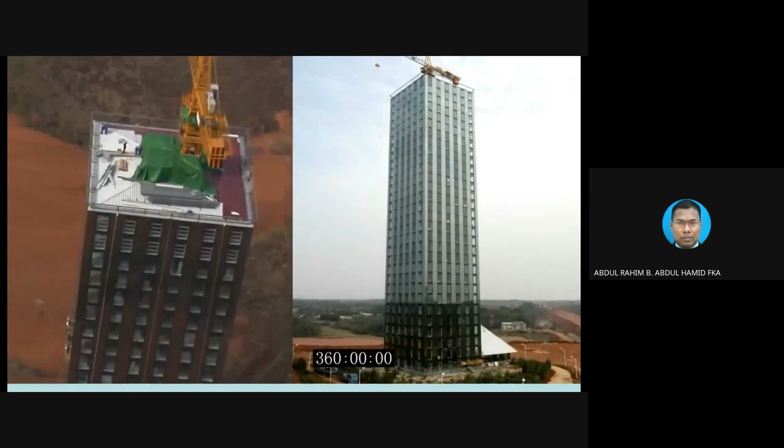I'm not really sure whether you can hear and see the short video clip or not, but there are a lot on YouTube, normally from China, of fantastic high-rise building construction done in a very short period of time. The one that you saw is basically the time lapse of about 15 days for maybe a 20-story hotel building.

The question is, if for instance we were going to construct those kinds of things in Malaysia, or in whatever country you are in, it might take a few years anyway, not including extension of time, delays, etc. I would say normally, easily you can go for 2 years or maybe 3 years. Okay, that is normal practice.

But the question is, can we compress or shorten the construction period to even perhaps 2 weeks for the installation period? Of course, the preparation and fabrication of what we call precast concrete panels, etc., might take a little bit longer than 2 weeks. But overall, it is much shorter than normal construction.

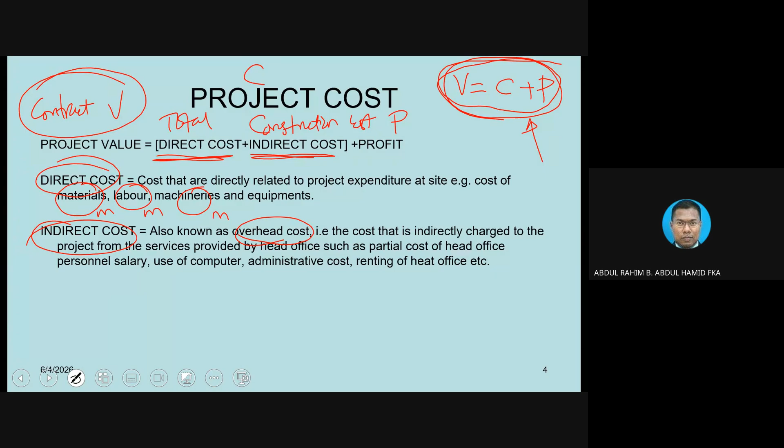That is an example for indirect cost, because by nature, indirect cost goes very well with the concept that the longer you stay in the office — for instance the site office — the more you are going to pay. You pay more rent, more utility bills, etc. But of course, if you shorten the project, the bill will be reduced. As simple as that. So the indirect cost-versus-time relationship is linear, very straightforward.

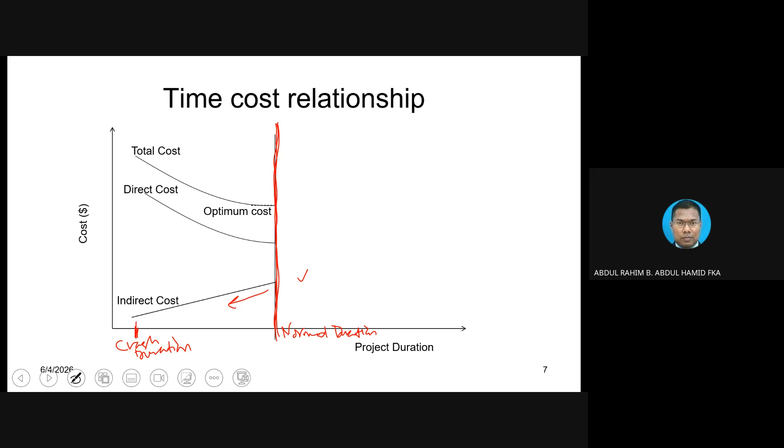But if we already started at the minimum cost, what happens if we want to reduce the period? If we want to reduce the indirect cost, it looks like the indirect cost will follow suit, following our reduction in time, because it is a linear relationship. For indirect cost, it's easy. But for direct cost, when we start reducing the period, we are going to see an increase in the cost.

So this is the assumption we are going to use in the subsequent example. Meaning to say, we assume the scheduler and project manager already came up with the best possible cost for the project, finding the optimum point. But when they start to reduce the project duration, they are going to see some escalation of the direct cost for sure, whereas there could be cost saving with regard to indirect cost. But indirect cost is not that much, only 10%. The majority of the cost will be coming from the direct cost.

So whatever you do, if you look at the total cost, it is going to increase as well. The issue is, why would you want to shorten the project time all of a sudden? Normally we do not do that, because we already designed everything perfectly according to whatever time could be considered reasonable. There could be a reason. First thing first, it is the client that requested the things to be shortened, to expedite. Let's say we get a project originally given by a client for 2 years.

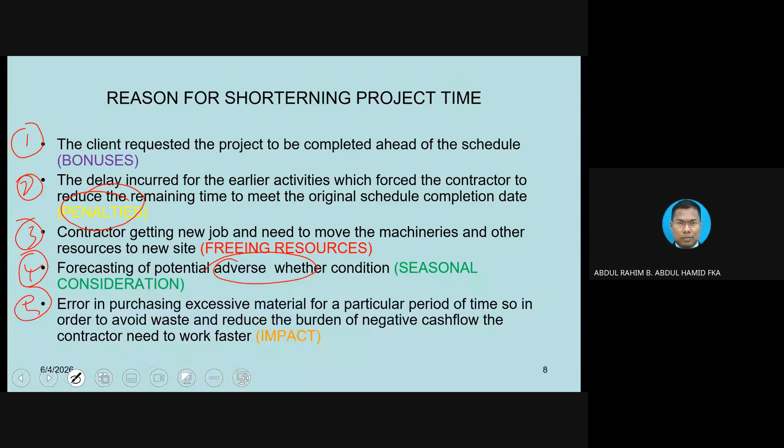The good thing is that once you start using the material, place the material, then you can start to get payment. So you avoid the cash flow issue. Because you already purchased those things, you need to pay cash to the manufacturer, whatever it is. But then you have to wait for the installation, then only you are being paid. That is the normal practice.

Why don't you expedite? Those are some examples. And basically, how do you shorten the project time? There are two ways. One is to resequence the activities. This is just an example.

Let's say you plan certain activities or tasks as finish to start. If you do that, you notice the overall completion of certain activities could take a long period of time, because every activity is finish to start. Why don't you utilize what we call lead, for instance, or you can even overlap, synchronize some of the activities. But if you want to do that, certain activities start at the same time.

The only way you can do that is you need to use a different team. You cannot use the same team again and again, because one team has to work on certain area, another team has to work on other tasks. They cannot do the work both at the same time. That is the logic. Because of that, you can see the cost will increase, because you need to have two teams instead of one team. So that is what we call trade-off.

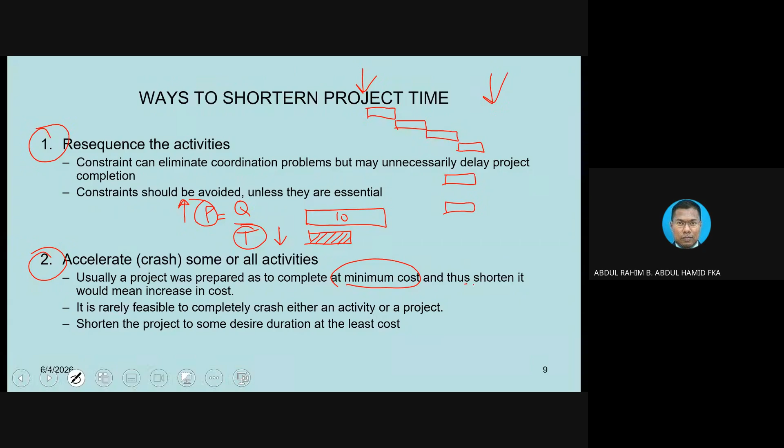Usually a project is prepared to be completed at minimum cost. This is what this graph is all about, minimum cost. That is our assumption. From now on, our assumption is that the project has been designed that way. Shortening it would increase the cost. This is our assumption, even though we know that if we take it to a certain extreme, there could possibly be a way to reduce the cost further, but there is a certain point. We are going to see those examples.

Number two, is it really feasible to completely crash either an activity or a project?

This is a very important point. Once we go through the example, you are going to see that in a project there are many activities or tasks. We do not simply just crash one activity for the sake of compressing the overall project. Sometimes it doesn't work that way.

Sometimes it is very insignificant, very minimum. Why basically would you want to do that? You are going to crack your head, but then you are going to get a minimum outcome. We normally do not do that.

Or we compress all the activities, the whole project. That is another issue. Later on, when we go into the example, perhaps you can see not all activities can be compressed.

Even though all activities can be compressed, the cost could be very much, to the extent that it might not be affordable. That basically goes against the concept of the project anyway. In a project, for instance, you want to complete the project within time.

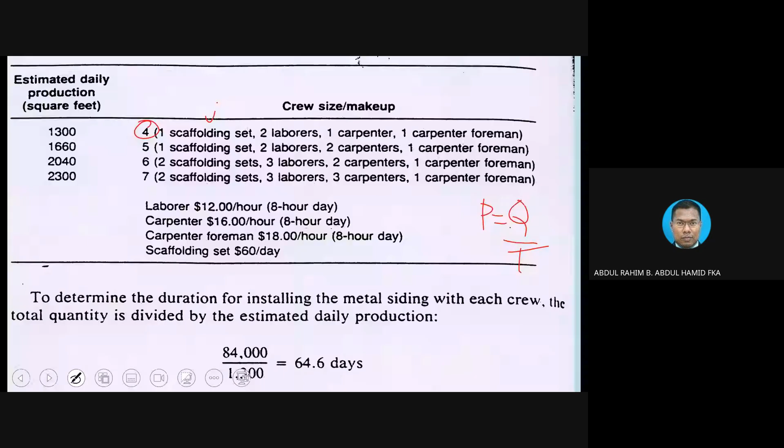This example uses the concept of scaffolding installation, tubular scaffolding, the normal scaffolding. Let's say, for instance, we use a crew of four, consisting of one scaffolding set, two laborers, one carpenter, and one carpenter foreman. This is what we call the productivity rate, P. So four crew members can install 1,300 square feet of scaffolding area. Okay, we measure by area.

Okay, construct the area, and then if we increase the crew to 5, what is the difference between 4 and 5? We increase one carpenter. When we increase to 5, you notice the productivity is much more, the output capacity is much more. And then we increase to 6. When we go to 6, we maintain everything the same, except scaffolding now has 2 sets, and laborer now has one extra. That is a big jump from set 4 and 5.

And then we go to 7, and you notice the productivity is much more, and we add one more carpenter. Each item here can be calculated in terms of cost, because we know how much the scaffolding set costs, how much the laborer wage is, the carpenter foreman, etc. This is just an example based on whatever the current cost is anyway.

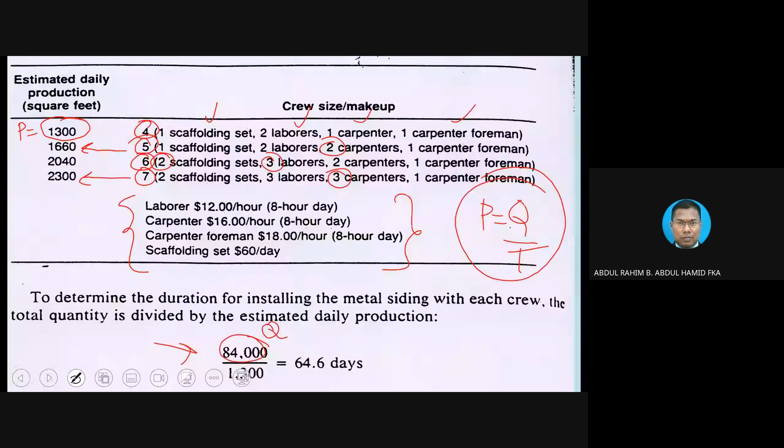Let's say we need to install this much area, 84,000 square feet, divided by the first one, 1,300. So this is just an example, and we are going to get this duration. Remember, how do we calculate the duration? Using this concept - this is what we call productivity rate. Okay, if we can calculate like this, then we can calculate for every situation using different crews, because different crews will have different productivity, in order to see which one costs how much.

This is what we get. For instance, using a 4-number crew, this is what we already calculated in the previous slide, and we can round off like this, and calculate the cost using round off or a certain decimal point. Okay, let's focus on the round off - it's easier. Meaning to say, we use 4 crew and then 65, right? We round off into 65, and this is the cost we calculate using 4 crew members. Crew meaning this scaffolding, 2 laborers, 1 carpenter, and 1 carpenter foreman.

Okay, now let's go into 5. Let's say we increase the crew size to 5. We can reduce further - how much is the cost? You notice that the cost, instead of 34, now becomes 33. It looks like the cost basically decreased.

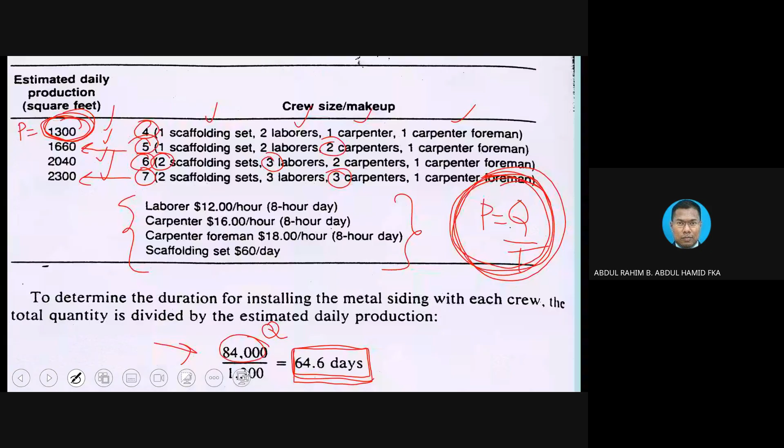Notice what happened if we go for crew number 6, we can reduce further. We can speed up the project because it basically uses 2 scaffoldings, 1 extra laborer, etc. And you notice one thing, now the cost starts to increase again. And when we go into using 7 crew, the cost basically starts to increase.

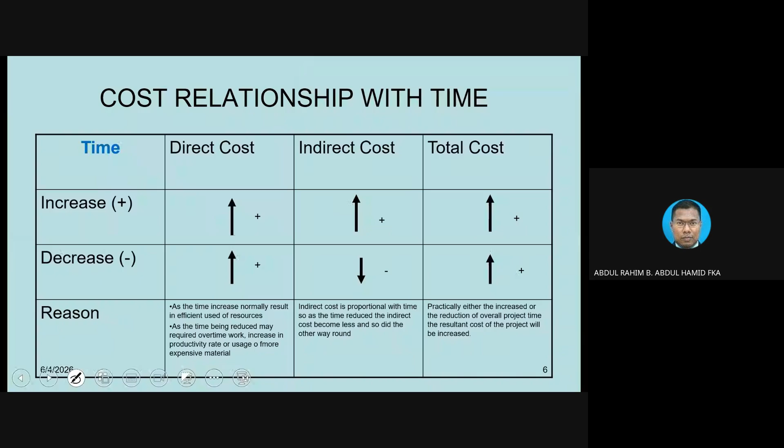And that is consistent. When you use the concept like this from the beginning, we say we can reduce, but then when you reach a certain point, if you want to reduce further, now you can see the cost basically starts to increase again. So this is the whole scenario.

But the issue is that the project manager, scheduler, and planner at the beginning, they can play around with the schedule and arrange things in such a way in order to see how much is the cost with respect to different ways of putting things together. If, for instance, after they already get those kinds of things, at the end of the day, they need to decide. This is what the graph we are talking about.

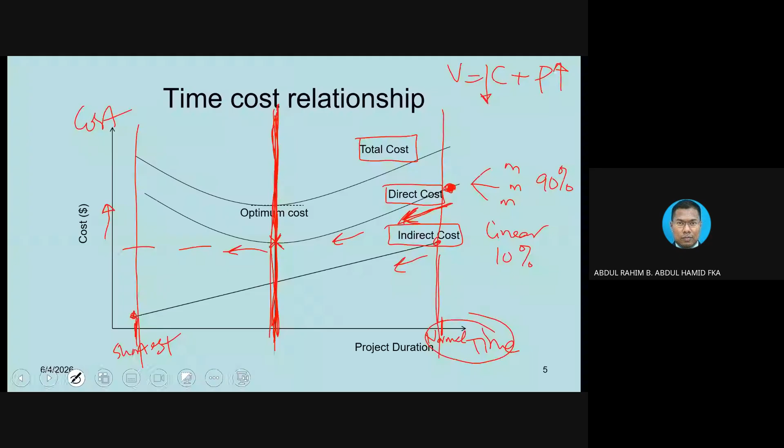So from now on, we basically use the concept that we do not want the values on the right hand side of the graph. We assume that the scheduler, planner, and project manager already plan something based on the minimum cost. And if we already have this kind of data, we plot it into the graph, then we can see some kind of relationship developing.

What is cost slope all about? Cost slope basically indicates the constant value that we can relate to cost reduction for one activity, and subsequently for all the project that consists of that activity. At the end of the day, if we want to reduce certain activities, then we know how much the cost is going to increase with this constant value of the cost slope.

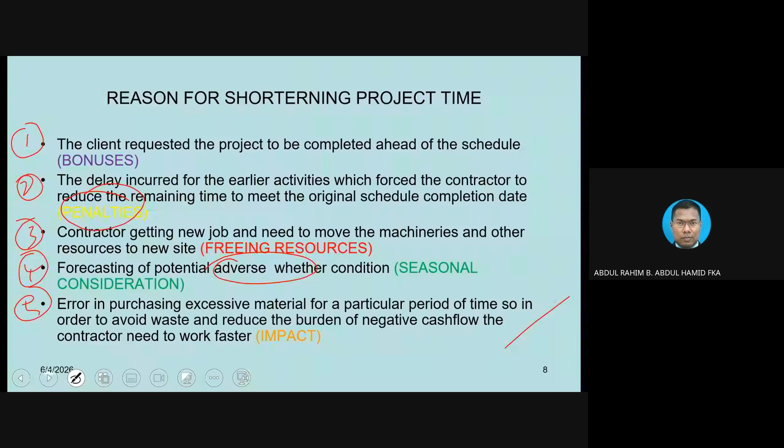Because of this relationship, in order to make it easier, we are going to use the concept of a straight line. This straight line will tell us the cost slope. How do we get the cost slope? Let's assume we have 2 points only. This point indicates normal duration.

A normal duration of executing an activity or a task. We can do a task, let's say we can concrete a slab for a room, whatever, in 7 days. So that is what we call normal duration. Maybe to construct a slab, we normally need the formwork, the rebar, and the concrete, and of course manpower, material, etc.

We count those costs, so this is what we call normal cost. So normal duration to construct a slab is 7 days, let's say 7 days, and how much is the cost? Maybe like 1,000 ringgit, that is the normal cost. But then what happened if we want to crash the slab construction activities?

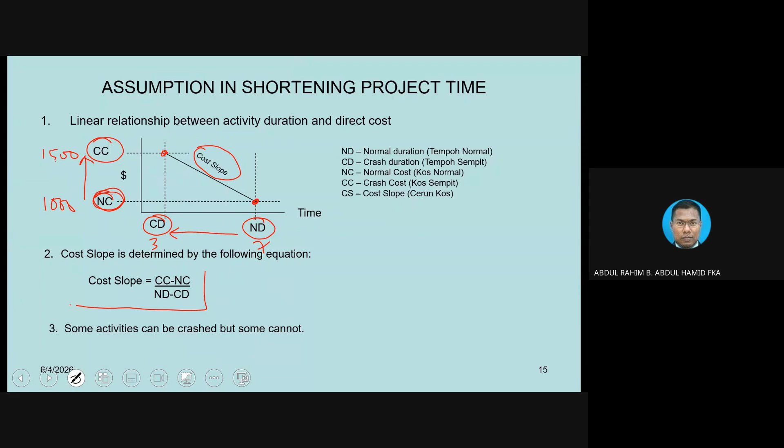So once we have this kind of relationship, then we can calculate the cost slope using this formula. How do we calculate the cost slope? It is given by taking the differences between the highest cost minus the normal cost. So we say 1,500, and then 7 minus 3. 500 divided by 4. So this is what we call the cost slope.

Cost slope is the constant, okay? So how much is 500 divided by 4? Let's say 500 divided by 4, you get 125. What does this 125 mean? It means the additional cost. If, for instance, you want to shorten the project by 1 day, that is the additional cost.

So we need to establish one thing. The normal duration is 7. If you want to complete the project in 7 days, the cost is 1,000. But what if you want to shorten the project, instead of 7, reduce it to 6, meaning you reduce 1 day? So the cost now becomes 1,000 plus 125. You see, this 125 is the constant that we calculated before. That is what the cost slope is all about.

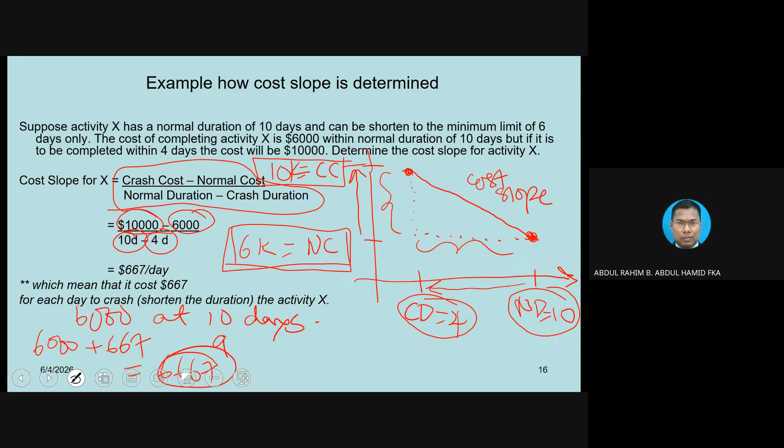Again, the cost slope using this formula: you take the higher cost, 10,000, minus the lower cost, divided by the higher duration in the graph minus the lower duration, which is the crash duration. You get 667. So 667 is the constant for that activity. If you want to reduce 1 day, you need to add 667 to the normal cost.

So this is the normal duration: 6,000 for 10 days. But if, for instance, you want to reduce the project by 1 day only, that 1 day basically requires an extra 667. So what you need to do is add up 6,000 with 667. At the end of the day, the project needs to be paid that extra 667. And then, of course, you can complete the project by reducing 1 day. Now the project becomes 9 days.

So now you already know the relationship. If, for each activity, you know that kind of relationship, then it is much easier. You put it into the whole network, because remember the whole network diagram - each activity does not run one by one in one go. Sometimes they can run parallel, synchronized, overlap here and there. So that's why you need to look at the whole network diagram. Only then can you see how much the cost increases or decreases.

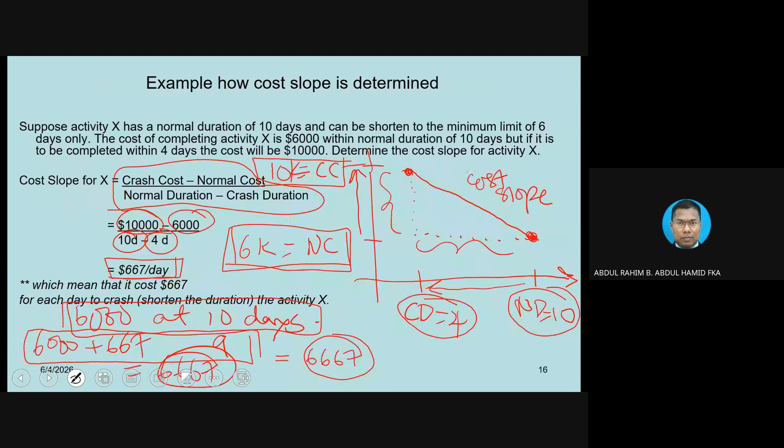Number 3, start shortening by selecting the critical activity with the least cost slope. Least cost slope means the cost slope which has a lower value compared to others. When we have, say, 10 tasks - A, B, C, D, and so on - each cost slope might not be the same. There are cost slopes which cost more, and there are cost slopes which cost less, so the one that costs less is much more preferred. But again, critical activities are the main criteria, and then you need to take a look at which one is much cheaper.

Number 4, the shortening process must be done in steps. I sometimes call it step, I sometimes call it cycle - cycle number 1, cycle number 2, 3, and 4, whatever. In some books, they call it step 1, step 2. Meaning, in order to do this exercise, we need to duplicate the diagram. Let's say you already have an AOA diagram or PDM diagram for the original network, and you need to make a few duplications. Why? Because you are going to jot down your rough calculations in cycle number 1, cycle number 2, cycle number 3, 4, and 5, and only at a certain cycle will you get the answer.

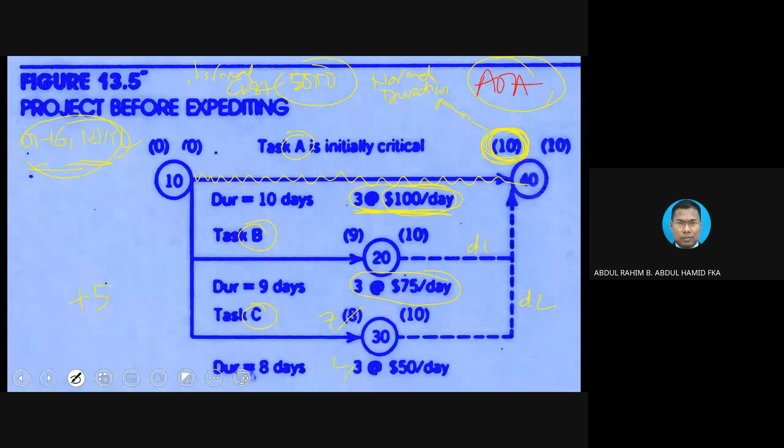Now it becomes 7 days, and this activity remaining is 2. Okay, I do the whole calculation again. Even though I slash activity C can be completed in 7 days, but the whole project still remain 10 days. What is the purpose? It basically defeats the purpose, isn't it? But now you already have extra 50 ringgit that you need to bear. Where does the 50 ringgit come from? From here.

So you see, this is the point. You simply do not crash activity for no reason. Even though you can crash activity C, but why? Because you crash activity C, yes, activity C can be reduced, but then the overall project still remain the same. So it basically defeats the purpose. So this is what the previous point that I already mentioned before. Here, this is the point that I already mentioned here.

This is the things. Okay, you simply do not compress thing which basically have no purpose. Okay, now we are going to compress the project. Okay, let's take a look at example. Let's say I say this is a cycle number 1. Okay, cycle number 1, you see, you notice that I jot down here.

That's why I need to copy paste this figure again and again, because I need to basically jot down many things, and then I slash here. So meaning to say now activity number A, activity A is going to be done in 9 days. I slash 1 day, I crash 1 day.

And activity number 2, the remaining 2 days more can be crashed. And you notice that when I redo the calculation, okay, I managed to slash the activity by 1 day. This is, you see, I reduced by 1 day. But how much is the additional cost? Because each activity A, the cost slope is 100 ringgit. If I want to slash by 1 day for activity A, I will have to pay additional extra 100 ringgit. So in cycle number 1, you notice that I can reduce the project by 1 day, but then the cost will increase by 100 ringgit.

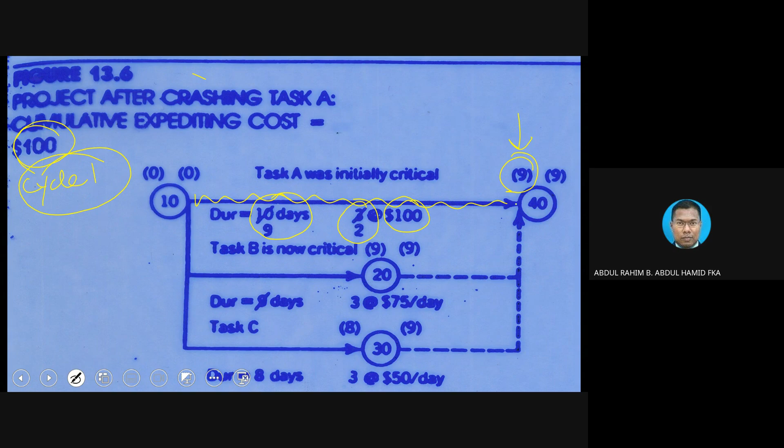From where? From the original. Remember, the original is 5,000. But we do not add this thing yet. Okay, we can add those things at the end of the example anyway. But this is just to give you the whole idea. How basically we can reduce the project once we know how much is the cost slope, etc., by doing this kind of exercise. And after cycle number 1, you notice there is a significant differences between the original diagram and the cycle number 1 diagram. You notice the critical path now become 2 instead of just 1.

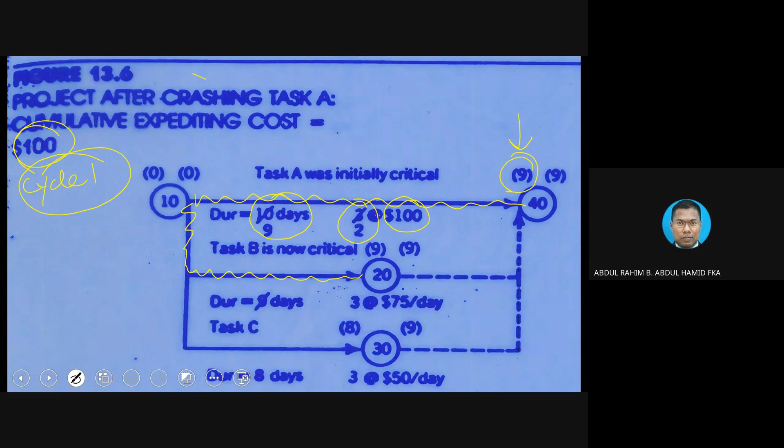This is what step number 5 is all about. Look for the formation of second, third, etc., critical path. Now you see the critical path, the extra critical path emerge. Let's say cycle number 2. Cycle number 2, you want to reduce by another 1 more day. Okay, this is, I call it cycle number 2.

Cycle number 2. Okay, you notice that the critical path based on cycle number 1 is only 9 here. And what I did is that I just slash and become 8 here, and activity A basically there is another 1 more day, and B now have to be slashed as well because they are both critical. And when I get 8 here, when I redo the calculation and I manage to get the project to be reduced by another 1 more day in cycle number 2, okay, by reducing both activity A and B at the same time.

Why should I do that? Because if I reduce only A, it is not going to work. It's not going to work because A and B are having the same critical path. So I need to basically focus on those two. When I focus on those two, meaning to say the cost increase now become more. 100 ringgit for A plus 75 ringgit for B. See? An increase of 175. This 175, if I add with the previous one, was 100. Now the cumulative become 275 in the cycle number 2. You see, that is the increase in cost. Cumulatively, okay, cumulatively is 275.

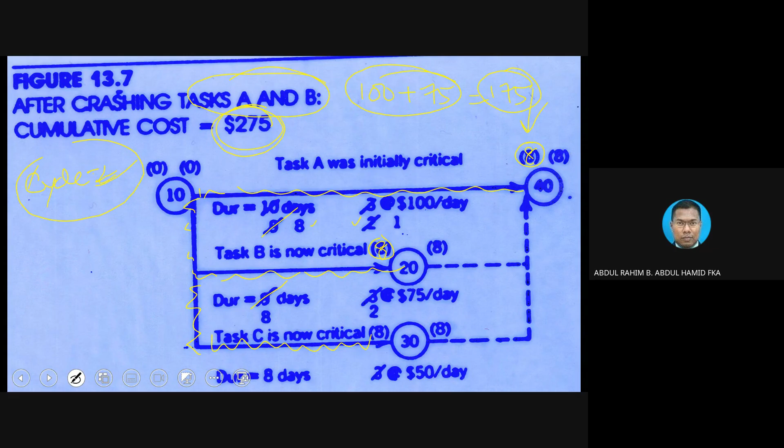Okay, now, cycle number 3. Let's say I want to further reduce by additional 1 more day. And you notice in cycle number 2, even C now become the critical. Now all the line become critical. If I want to go for cycle number, sorry, cannot write anymore. Cycle number 3 here. Cycle number 3, you notice that the critical paths are A, B, and then even C. So meaning to say, I need to crash A, B, and C simultaneously. When I crash 1 day each for A, B, and C, and of course, you notice the additional cost would be 100 plus 75 plus 50.

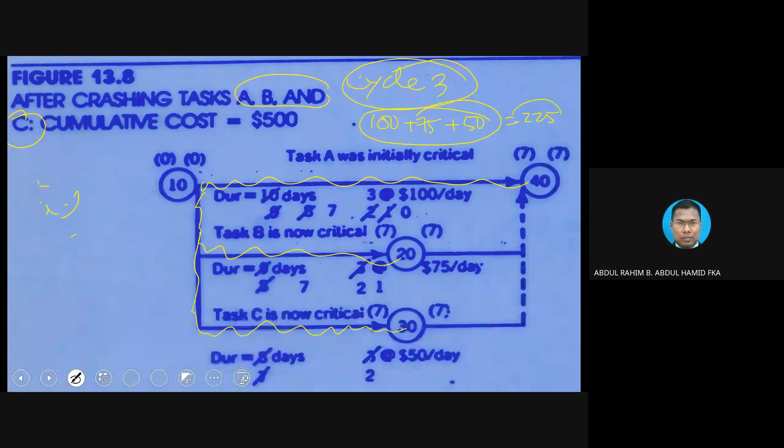Okay, plus 50, so this is 225. 225 plus the previous one gives the cumulative 500 ringgit extra cost. And you manage to get the project reduced by 1 more day, so in total 3 days from the original.

Okay, what do we get from this exercise? Now we go into the last slide. You notice we can plot the whole relationship here to show you the issues. Remember, we start with 10, and this is the normal cost given to us, 5,000.

Then we did the cost, the time reduction. We go into 9, and we go into 8, and we go into 7 only. But there are a few more data from the given answer.

Let's assume you, as a contractor, are getting a project to construct a toilet or renovate a toilet for your client. So you give the client some kind of idea or schedule: 10 days to construct or renovate the toilet, and the cost that you give to the client is 5,000. So your client basically initially agrees with that.

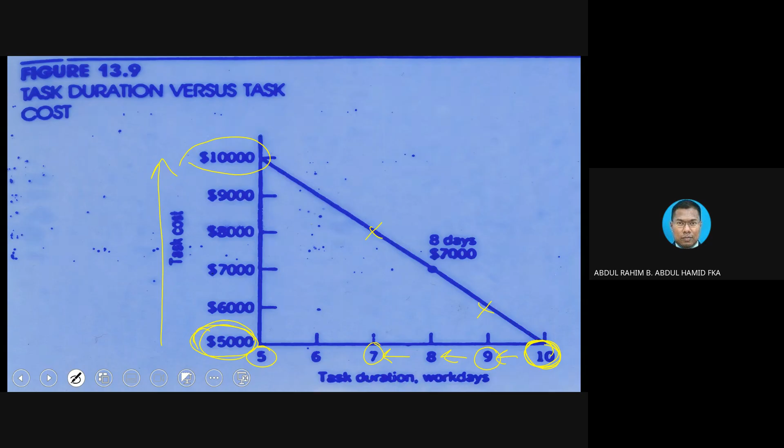All right, so this is what project time-cost trade-off is all about, from the concept. But if, for instance, this is just 3 activities, a simple case, what if you have more data, more activities, like 1, 2, 3, 4, 5, 6, 7, 8, and 9 activities? We do not want to go through this exercise again; I just want you to look at the final outcome.

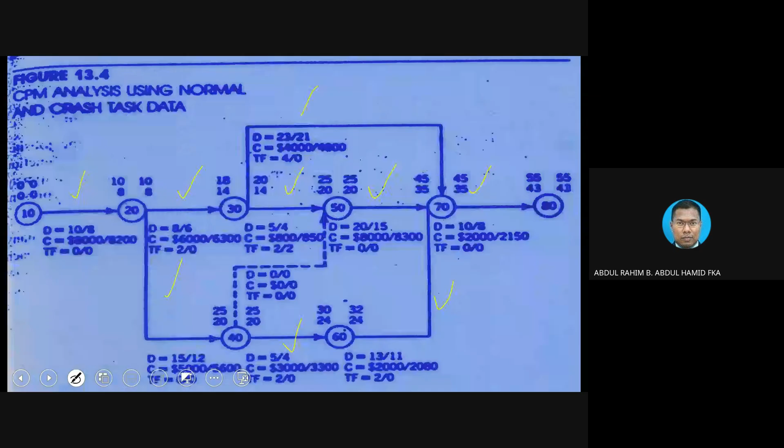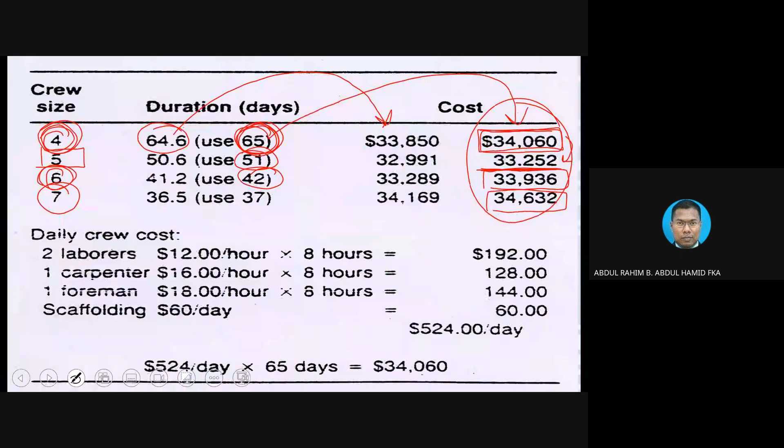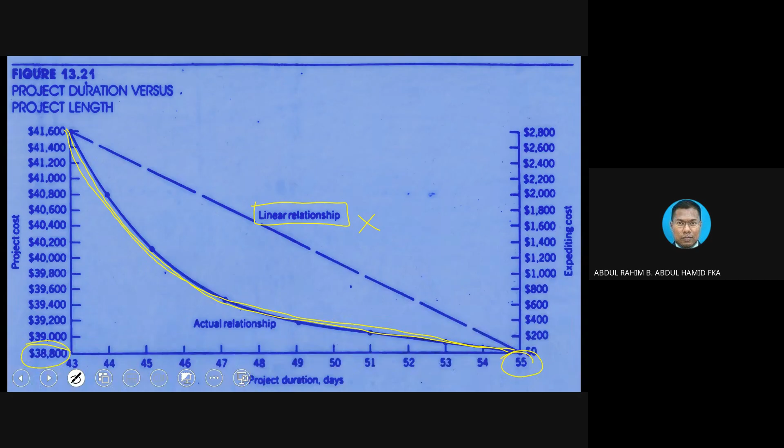This is the thing I'm telling you. Once we have a lot of data and do the exercise, at the end of the day we get that kind of relationship, so we can play around or discuss with your client. For instance, instead of 55 days with a cost of 38,800, you can reduce to a certain number of days and give that cost to the client. This is like a bargaining kind of thing, but based on the calculated data, you're not going to run the project at a loss because you already calculated everything.

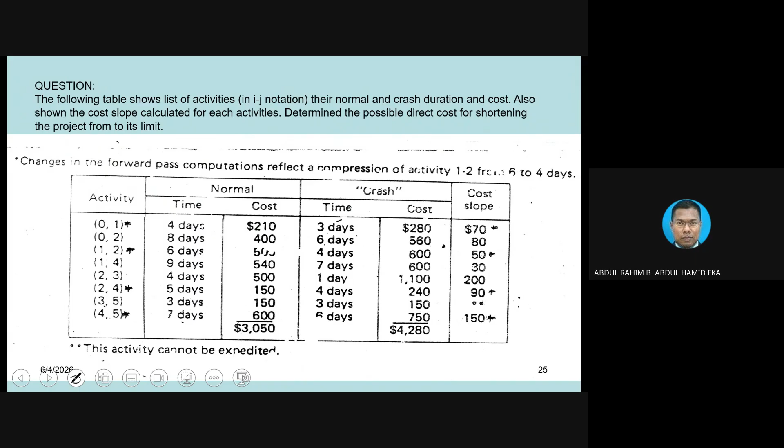Now we go into another example. This is the data we need. In our case, we are teaching you about the concept, so we give you the data. First, we need the data about the task or activity in terms of the predecessor relationship, and then the normal time, which we call normal duration, the normal cost, the crash duration, and the crash cost. Remember, we need this information to calculate the cost slope.

Let's say item 01. How do we calculate the cost slope? The cost slope for item number 01 is basically the higher value of the cost minus the lower value, 280 minus 210, divided by the highest value of the time minus the lowest value, 4 minus 3. So this is 70 over 1, which is basically 70. That is what the cost slope is all about.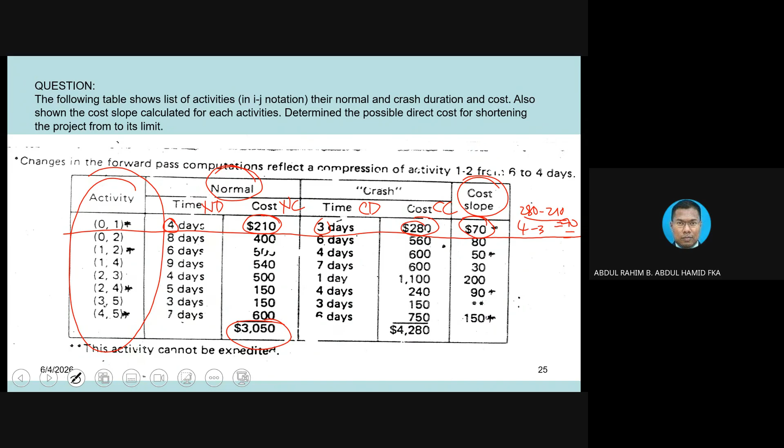You can calculate the cost slope based on the given information. Remember the word normal — normally the project can be constructed based on this normal cost. You add up this normal cost for each activity, and at the end you establish what is the normal cost for the entire project. Similarly, you can calculate the crash cost for the entire project at a certain extreme.

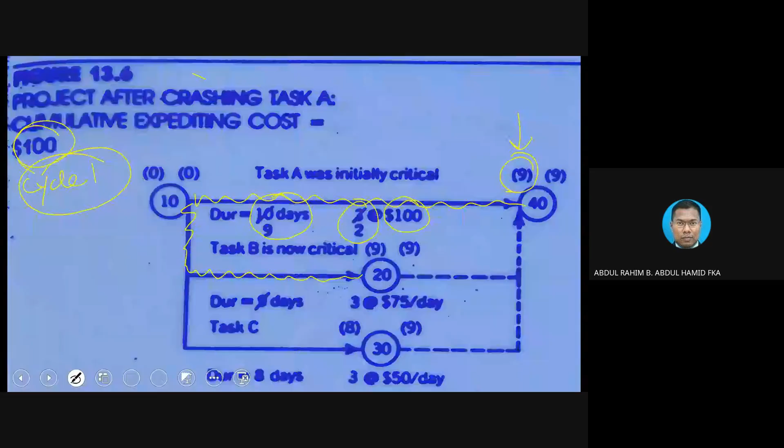So now we know the critical path, and we also know the project completion duration. This is what we call normal duration, which is 22 days. How much is the normal cost? We already established the normal cost for the project is 3,050 dollars, with a normal duration of 22 days.

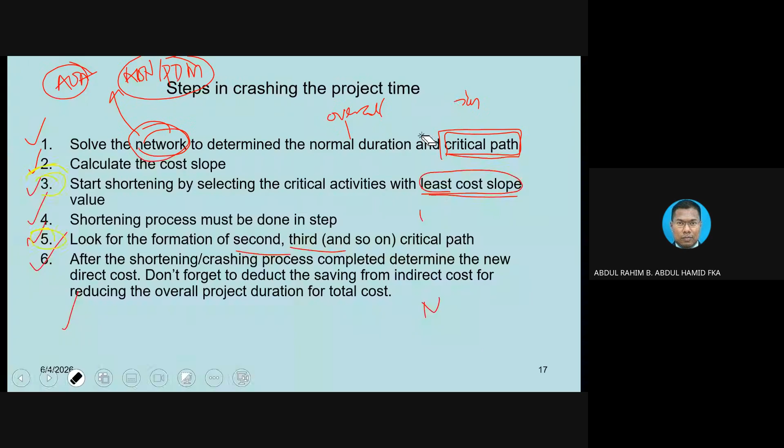So you put the note onto your diagram so that the next step you can start what we call crashing. Now let's say we want to start crashing on cycle number 1. I want to crash the activity by 2 days in cycle number 1. This is the original diagram. Now, starting cycle number 1, I want to crash the project by 2 days straight away. So which activity should I crash? Based on this step — let me erase here — based on this step, first thing first...

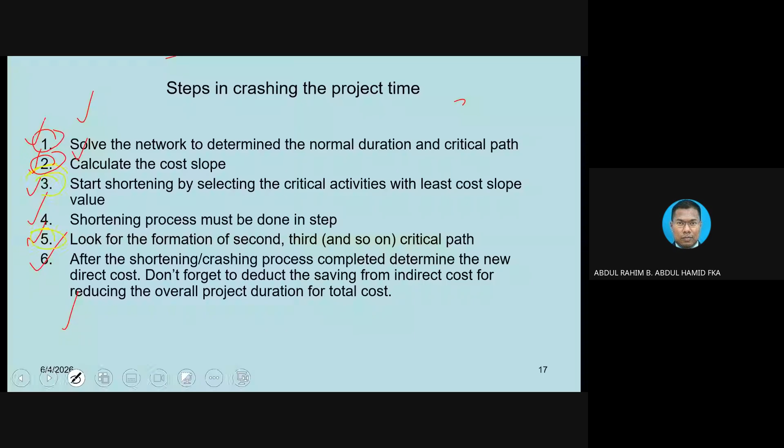First things first, item number 1 already completed. Cost slope, we already completed. Start shortening on the critical activity with the least cost slope.

Okay, by looking at this diagram, the one that we focus on is the red colored line: activity 01, 12, 24, and 45 only. Don't bother about other things because the others are not critical. Remember what step number 3 mentioned about the critical activities, and the critical activities are the ones red in color.

Okay, now second criteria, look at the one which is cheaper in terms of the cost slope. By looking at this, the only activity that I can think of is activity 1,2. It is on the critical path and it is cheaper.

Another question is, is it possible to crash that activity? Because that activity is in the middle of the network, we need to do the calculation so that at the end of the day we want this value of 22 to be reduced. That's why we need to duplicate the diagram like this.

Okay, this I call cycle number 1. Cycle number 1, what I did was I simply crash. I write down here: crash activity 1,2. This activity.

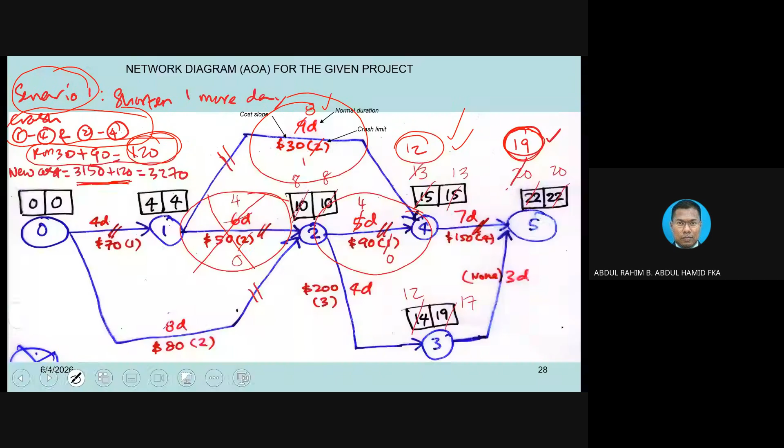120, if we add with the previous increase that we already slashed on activity 1-2, now our extra total cost would be 3270 for scenario number 1.

That is one possibility. Now let's go into scenario number 2. Still trying to crash activity by an additional 1 more day, but instead of focusing on activity 1-4 and 2-4, now I focus on activity 4-5, the easy one, because it is at the end of the line there. Of course, whatever changes, it will directly change the project duration anyway. But it's basically more expensive.

150. If we add with the previous cycle 1 crashing, then we are going to get this amount. You notice that in scenario number 1, I get 3270. Scenario number 2, I get 3300. A little bit more expensive, but I managed to fulfill the obligation of reducing by 1 day in both scenarios, except that the cost differs.

Now let's take a look at the final solution for this diagram. How to read this diagram? This figure simply tells us the project normal completion is 22 days and the project normal cost is 3050. How do we get this? From the question given here, 3050.

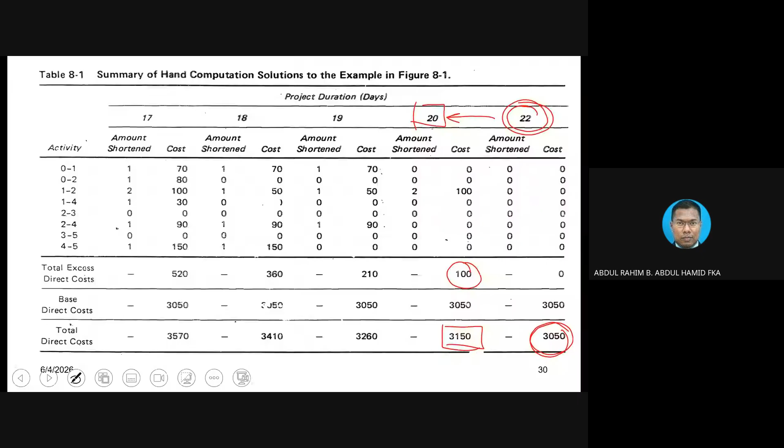That is what we established. Then what I did was I reduced the project in cycle number 1 by 2 days, and I managed to get extra. I basically increased the cost by 100, and the new total cost is 3150. But then this is the issue.

Let's focus on the 19 days only. When I reduce the project by the additional 1 day, I use scenario 1 and scenario 2. Scenario 1, I get 3270. Scenario 2, I get 3300. But the answer given is

3260, which is less than what I can get. Why is it so? You notice in this example, they basically crash three activities instead of two, or instead of one, which is basically what I did in scenario number 1 and scenario number 2. And this basically comes to the conclusion.

You notice that when we start, 22 days 3050 is the baseline. Then we go into 20, and this is what we get. But when I go into the 19, I didn't get this amount. Instead, I get 3270, and I get 3300.

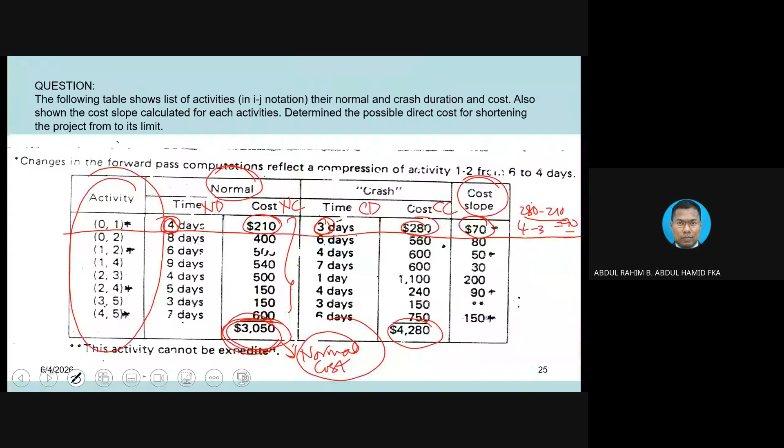And again, we go back to the fundamental of this subject based on this slide. This slide, where is it? Here.

This, you notice, is the thing we mentioned here, this point. Okay.

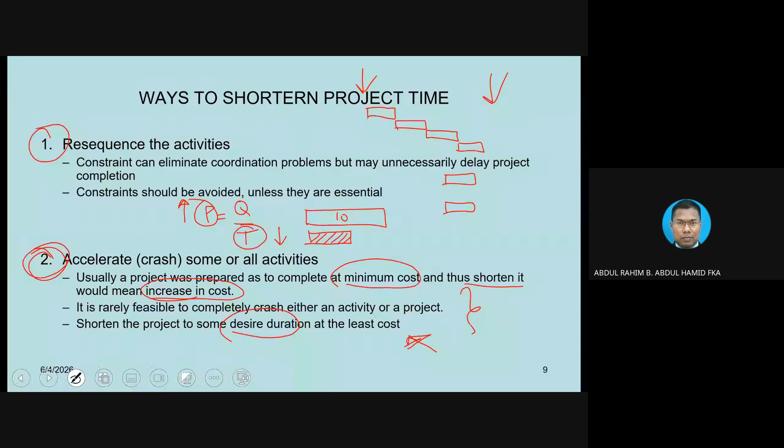It is rarely feasible to completely crash either an activity or project. We shorten the project to some desired duration at the least cost. This is the thing.

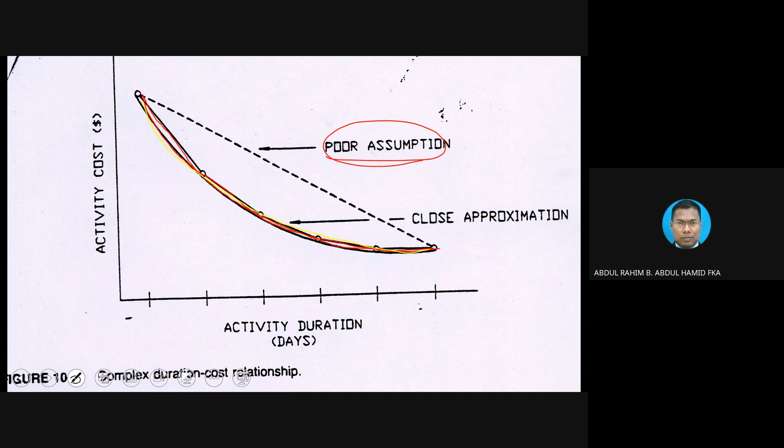We must remember, whenever we crash a project, because the original project was already designed at the minimum cost, when we try to crash it, the cost will of course increase. But it is always our intention to minimize the increase of costs as much as possible.

So if the question basically is asking us not only to reduce the time of the project but to keep the cost at the minimum possible, the only acceptable answer is this one, 3260. Because that fulfills the intention.

But of course, if the question is just simply asking you to reduce the duration of the project activities, and the cost is not mentioned to be kept at the lowest possible, then any cost that you mention along this line is acceptable. Okay, that is the thing.

So meaning to say, in order to do this exercise, this project scheduler, project manager, or planner, whatever, they have to be very creative. They have to find the best possible ways in combination so that the increase in cost is kept at minimum.

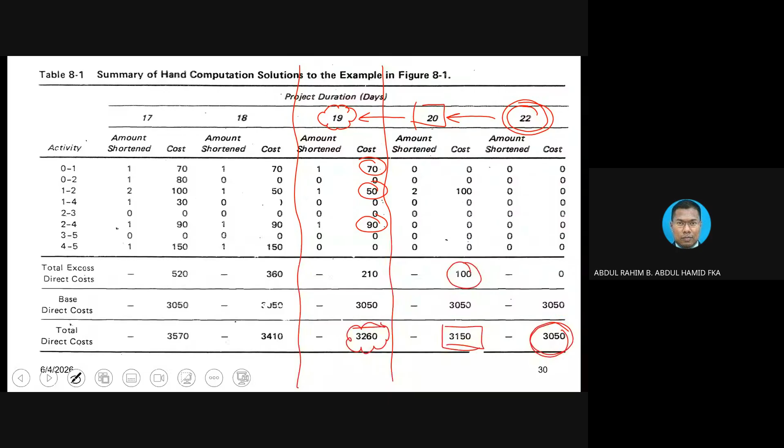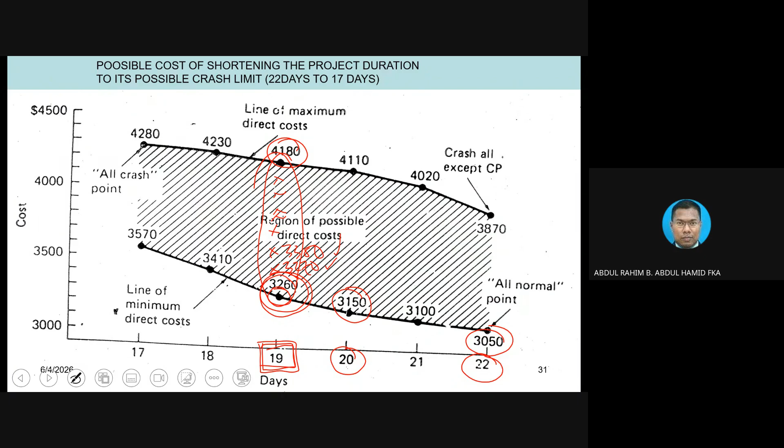And most people might not have the time to do so, especially when they think, why do I have to crack my head to maximize the project profit, whereby the profit will go to the boss anyway, and I'm not going to get anything. That is the thinking, unless the project is yours, your company, and you are the one doing these kinds of things. Then maybe you can go all out to figure out ways to get the best result.

Okay, we go into the last example of the day.

Okay, now let's say, normally even in your assignment number 2, you are given this kind of data. What kind of data? You are given an activity, and then the predecessor for sure, because you need to construct the diagram anyway. But inside here, we do not give you the predecessor, that's okay.

So you are given normal duration, ND. You are given crash duration, CD. You are given normal cost. And then you are given crash cost. Okay, all the data is given.

So immediately you know one piece of information is not given: cost slope. So you can calculate the cost slope very quickly by using the formula of what?

Okay, let's go into one example, activity A. Cost slope is given by taking 14,000 minus 12,000, divided by 120 minus 100. So basically this gives you 100 for activity A. That is the cost slope. You can calculate that one by one, quickly.

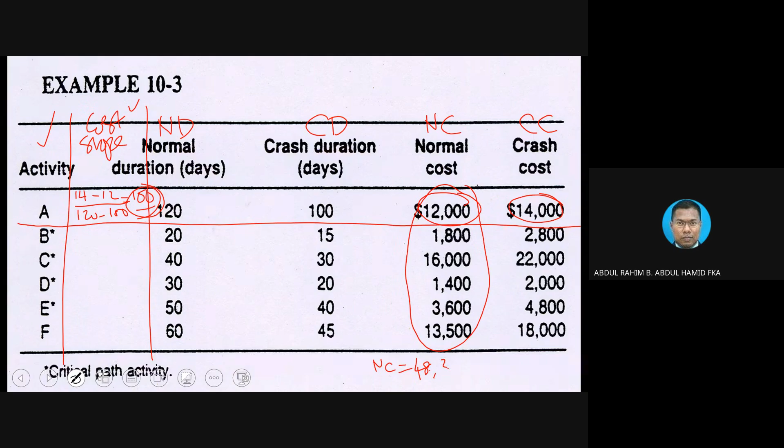And then you can establish the cost slope, then you can establish the normal costs here. If you add all these costs, then you are going to get the normal cost. How much is the normal cost? Normal cost is 48,300. Okay, now we already know the normal cost.

The cost slope for each we already have, but we need to construct the network diagram in order to know the normal duration for the project, the original duration. Okay, how do we do that? So we need to construct the network. This is what the network diagram is all about. Using AOA diagram, PDM diagram, doesn't matter, because the only thing we need to do is get the critical path.

The critical path is being shown in yellow there: B, C, D, E. And then each of these items shows the cost slope for each activity, so that we know when we want to start crashing, we must focus on critical activities plus the activity on the critical path which is much cheaper. That would be the priority.

Okay, but then this example has a plot twist. Plot twist in terms of what here? This is the data that we give you, assuming the information given here is just the direct cost.

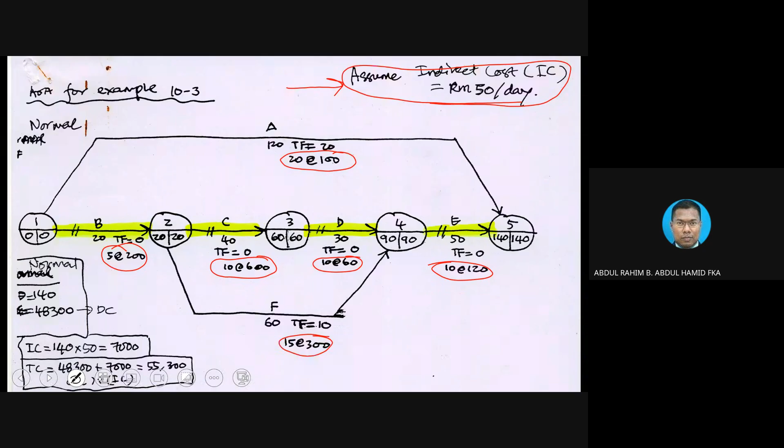So now we need to establish how many days the project required to be completed. That's why we need to construct the network diagram. At the end of the day, we get this value here. This is what we call normal duration, 140. Once we get the normal duration, then can we calculate the indirect cost?

Indirect cost equivalent to 140 days, and each day costs us 50 ringgit. At the end of the day here, we get 7,000. This is what we call indirect cost, 7,000.

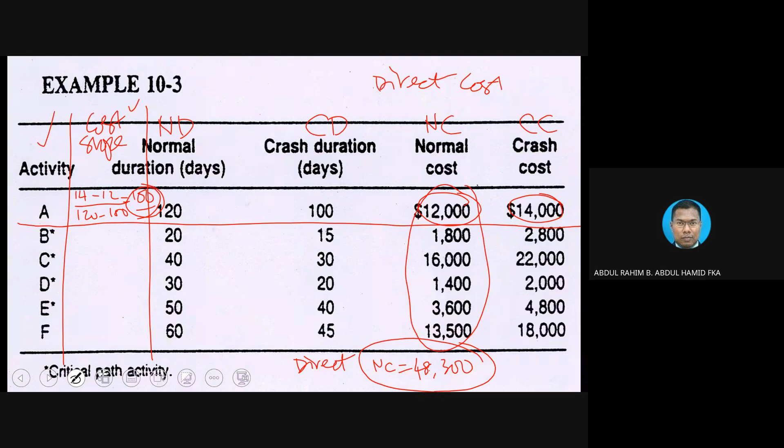What is the direct cost? The direct cost is given already. We get from here. This is the direct normal cost, because now it says that the given one is the direct cost only. Okay, so once we get the direct cost equivalent to

48,300, what is the total cost? Total cost, indirect cost plus direct cost. You just simply add both of them and you are going to get 55,300. So this is what we call the total cost, total normal cost for this project.

Because the one given is just simply the normal direct cost. Okay, so this is the cost that we are going to establish. We call it original. This is normal or original. Original diagram. Original.

Then what you need to do is basically copy and paste the same diagram again and again, because we are going to do a few cycles. I call it cycle. Cycle 1, 2, I think until cycle number 5. Okay, let's say now we already established we have 140 days.

What if I want to crash the activity by how many days? I will start with 10 days. Why 10 days? Because it looks like many of the activities on B, C, D, and E, the allowable limit will be either 5 or 10. So perhaps I can start with 10 days. And you notice that there is a cheaper activity among B, C, D, and E.

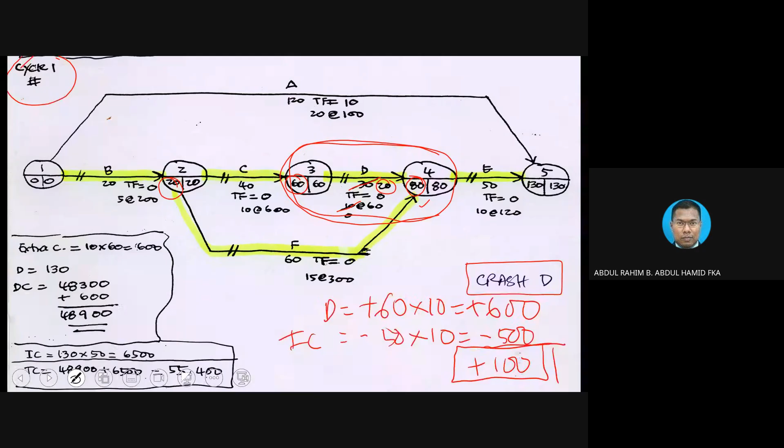So I'll start with 60, 60 plus 20 equivalent to 80. Okay, how about the bottom one? The bottom one, F, 20 here plus 60 equivalent to 80. Okay, it is possible. And then 80 plus 50 for E becomes 130. How about the top of the line there? A is 120. So now we have the 130 days, meaning to say we are able to crash by 10 days.

Okay, it is fine. So now we are able to crash by 10 days. And how much cost increase? See, you notice here, activity D. Activity D, the cost increase, each day we require 60. So this is 60, I time with 10. 10 times 60 equivalent to 600. 600 meaning to say additional money that I need to spend.

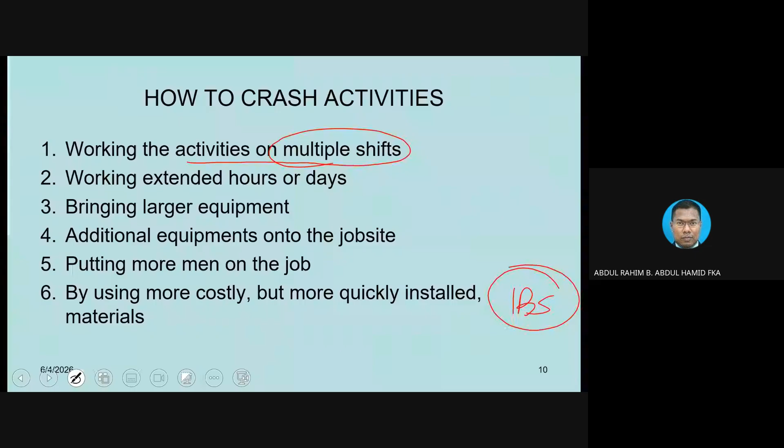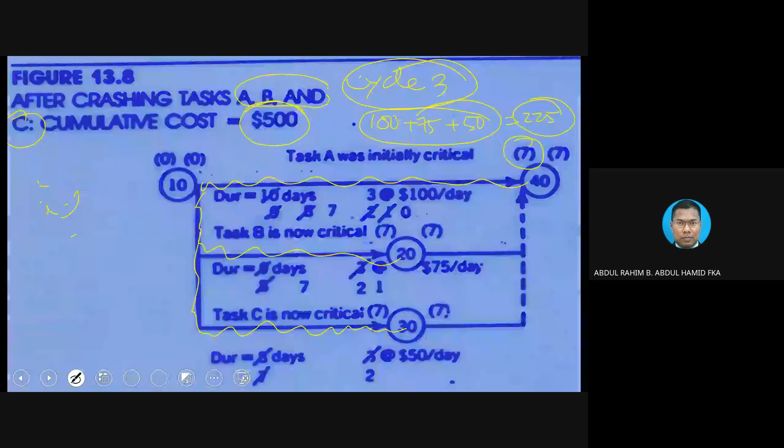This is a cost saving. By how much? Each indirect cost requires 50 ringgit, and I can reduce the project by 10 days. So 50 times 10 equivalent to negative 500. For the D, there is an increase in cost, but then there is a reduction in terms of the indirect cost. And the net increase for cycle number 1 is only 100. Why? 600 for D increase, and then 500 for the indirect cost. The net increase is only 100.

This 100, I add back to the previous cost here, 55,300. And I can conclude that this is the new cost, 55,400. And the project is going to be completed in 130 days, meaning to say I managed to crash activity D by 10 days. That would be cycle number 1. And after I did cycle number 1, you notice the yellow colored line. Now, activity F appeared to be critical as well.

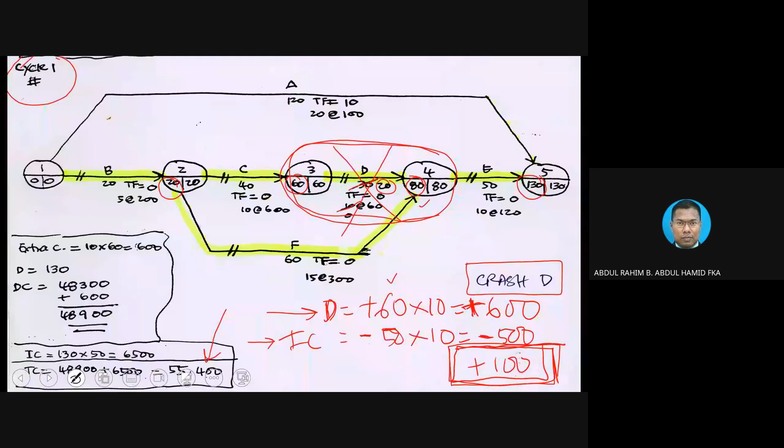Plus 700. What I did was I just add with this previous value. Now I get a new total cost, 56,100, and the project duration is 120.

Cycle number 2. After cycle number 2, you notice that all the line now become critical. Okay, become critical, and activity D and E cannot be crashed anymore in the subsequent cycle. Now we can focus on A, B, C, and F if we want to further reduce.

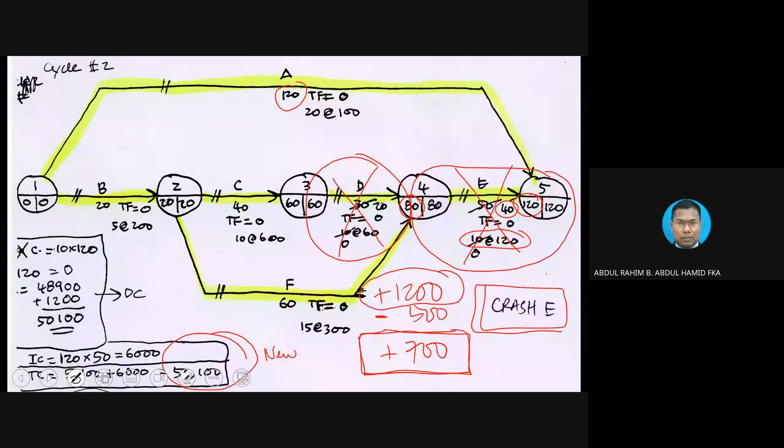Okay, cycle number 3. Cycle number 3, maybe I start with 5 days reduction only instead of 10. Why? Because B, it seems that the allowable limit is 5. So I want to start with only 5.

Okay, so cycle number 3, I reduce activity B and A. B and A only. So B is here, and then A is here. On top of that, I cannot simply reduce B alone, because if I reduce B alone, A is not going to reduce in terms of the timing, and at the end of the day, I cannot reduce the project duration from 120 into 115. But if I crash both A and B, it is possible.

So I redo the calculation again, focus on A and B. So it looks like it is possible to reduce the project by 5 more days. But then there is an increase. For A, basically costs 200 times 5, which is 500.

Sorry, B is 5 times 200, which is 1,000. A only require 100 times 5, which is 500. So the total increase is 1,500. But then the reduction in terms of indirect cost is here, 5 days only. 5 days basically we can reduce by minus 250.

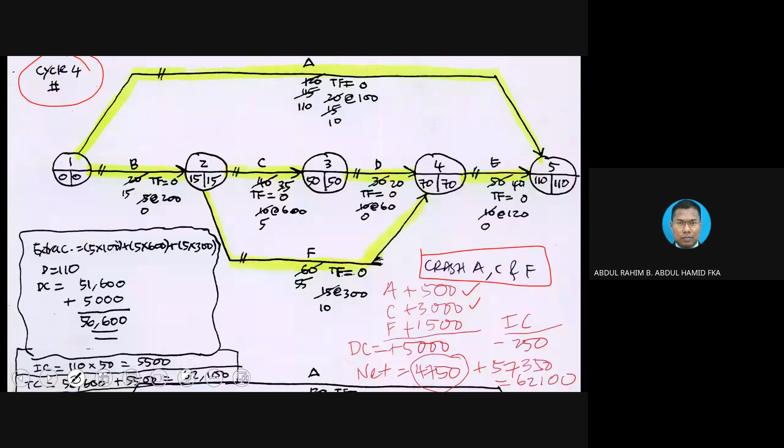And how much is the cost? A, 5 days. 5 days for A, 500. C, basically more expensive, 600 times 5 will be 3,000. F will be 300 times 5, 1,500. So the direct cost for all 3 of them would require about 5,000.

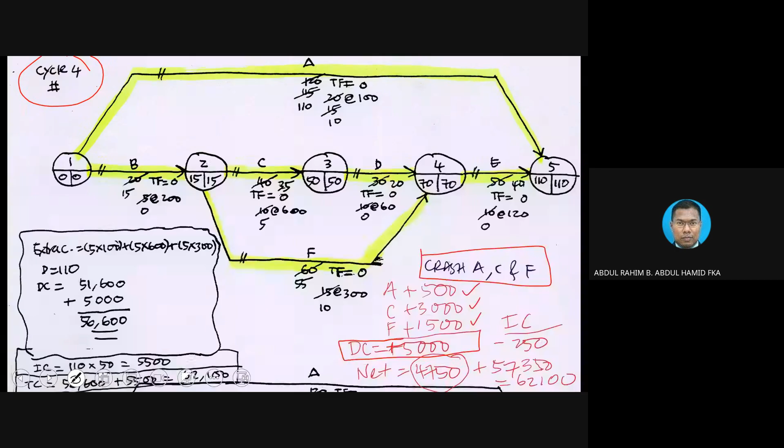But then the saving in terms of indirect cost is 250. The net increase is 4,750. And then you add back with the previous value here, you are going to get a new project cost, which is 62,100 here.

That is the thing. Okay, cycle number 4. So we managed to reduce further by 5 more days. But you notice that after we reduce 5 more days, A still can be reduced, C still can be reduced, and F still can be reduced. C still have 5 more days that can be reduced. Meaning to say, it is possible that we can go into cycle number 5.

So cycle number 5, this I change into cycle number 5. Cycle number 5 is just I duplicate the same. I take everything from cycle number 4 because we are going to crash the same activity anyway by another 5 more days. So whatever data that we have from cycle number 4, we just simply duplicate, add back to the previous value.

So we are going to get this amount. Okay, the amount is 66,850, and we are going to get the value, the project to be completed in 105, and it looks like C cannot be crashed anymore. The remaining A and F. I don't think A and F can be further reduced because it will not change anything. So meaning to say, after cycle number 5, what we get is basically we completely crash a project until it

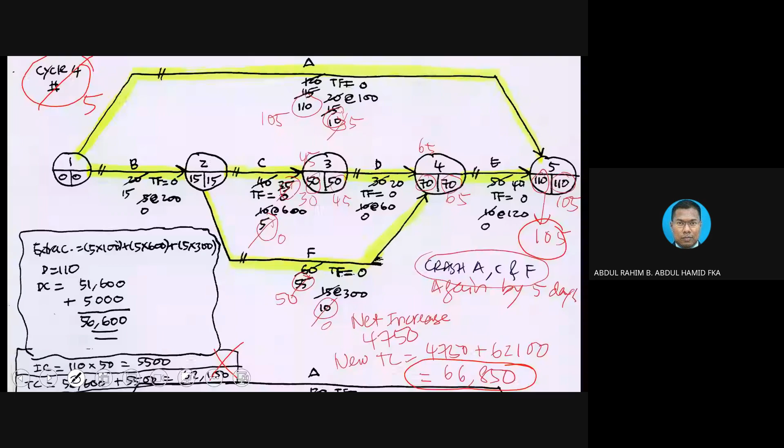Okay, that will be the slide, the end of the slide. The rest of the slide is just simply to test your understanding about, for instance, in the previous final exam, we asked about the direct cost slope. Well, again, if we are giving the data, the normal time and the crash time, crash cost and normal cost, so we can basically

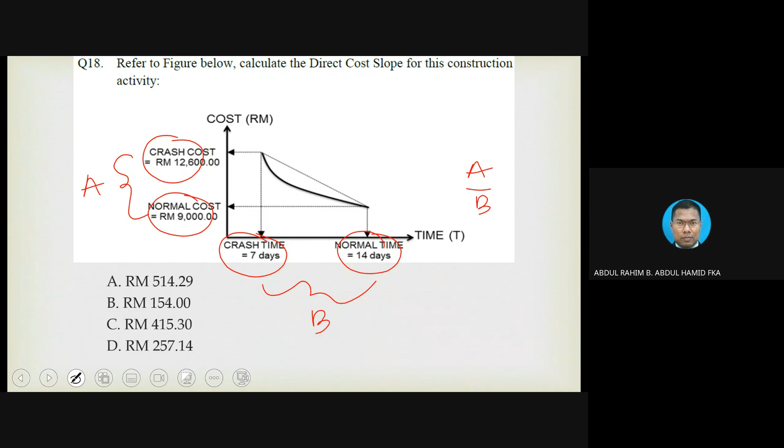do the calculation of direct cost. So again, the direct cost is just simply this A and then let's say B. A divided by B. The differences between the crash cost and normal cost, and then you divide with the differences between normal time and crash times, and then you are going to get the value of crash, the cost slope. Okay, and normally in order to do the calculation, we need to have this kind of data so that we can construct the diagram. We know the normal duration, crash duration, normal cost, crash cost, etc., etc.

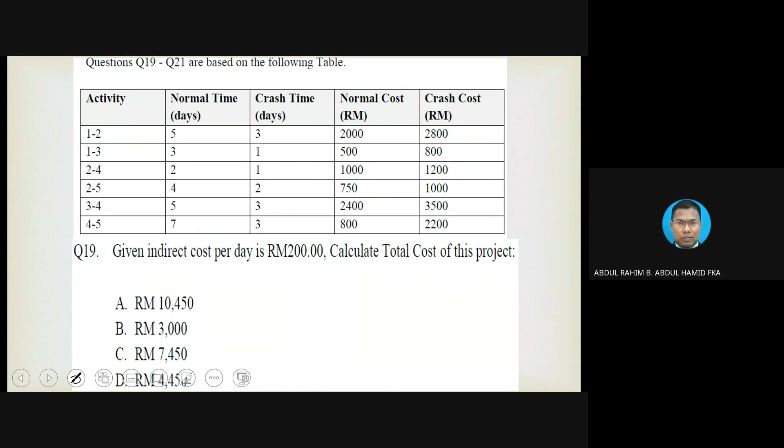And then if we split the cost between direct and indirect costs, so you must basically calculate the indirect cost. In order to know the indirect cost, you need to draw the diagram first, okay? Because we need to know the overall project duration. It is very similar to the one that our previous example anyway, okay?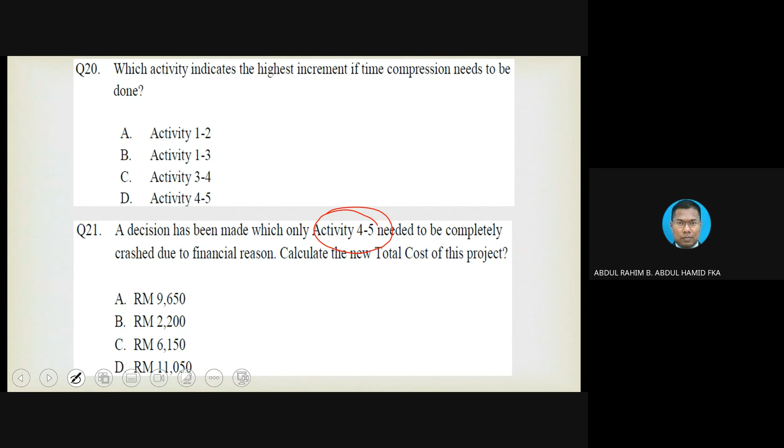Because some people do not understand the concept, they just simply crash one activity out of the context. So whatever it is, you must look at the activity in the network diagram. Then only you can understand how reduction of certain activity will influence the overall project duration and how much is the cost increase. Okay. All right, then that will be the class for today.